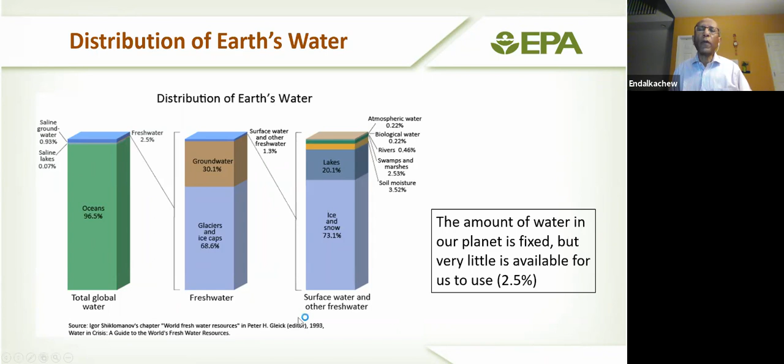So we really have to be very efficient and effective in using this water, and should not pollute it. Because of this, there is a global water scarcity. That water scarcity is defined as a lack of freshwater resources to meet the standard demand of water. Currently, one-third of the global population lives in countries where there is water scarcity, or the water quality is compromised for various reasons. There are many growing factors impacting both the water quality and quantity available for our existence and sustained presence. So what is water scarcity?

Depending on where we live and the conditions, the standard of living of those countries, or the technology and capability of the country, there are a range of causes for water scarcity. Most of North African, Middle Eastern, and Central Asian countries, including Mexico and Southwest United States, suffer from physical water scarcity, where there is not enough water to meet the demands of the public, including farming and other applications. So those really have a shortage of water.

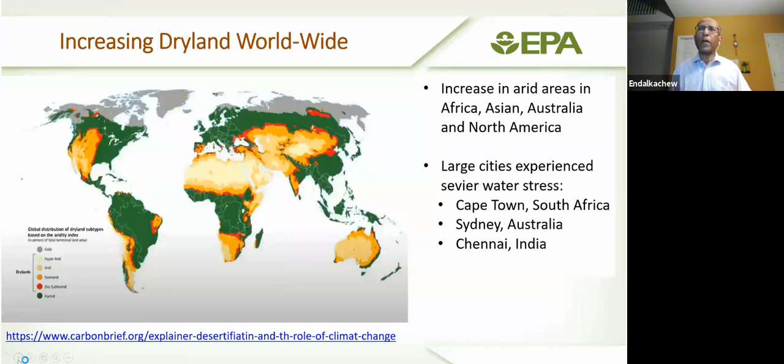That is why in 2016 the Global Economic Forum asked about 750 experts to assess different threats, what the global risks are. There are 29 separate global risks listed, and they were asked for their projection of the major global risks in the next 10 years. Water scarcity became one of the top risks, more serious than climate change, the food crisis, and migration and displacement of people.

Now, of course, this was before COVID, and in the last year there have been some other unforeseen challenges. But water issues are not going to go away. COVID may go away in the coming year or so, but not water scarcity. The link of water scarcity with other issues - economic, social, technical, and environmental risks - connects it to a lot of other problems. This continues to be a challenge.

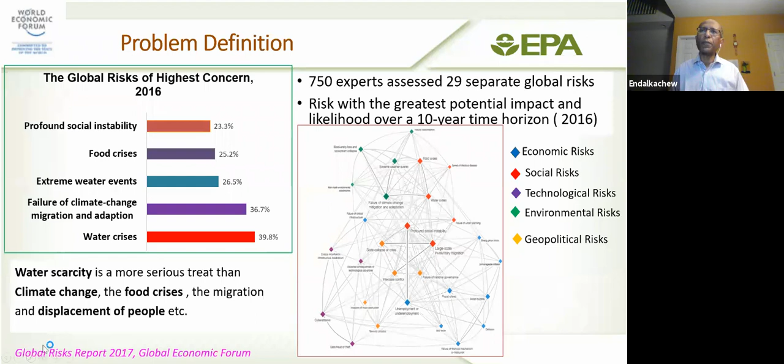In Africa, we have seen that there is a United Nations Development Goal by 2030 to achieve universal and equitable water supply, for safe drinkable water, and also sanitation for the global population. There is a lot of progress towards this goal, but Sub-Saharan Africa still is behind in achieving some of these goals. Part of the challenge is that water scarcity also affects women and children because they are more involved in fetching and collecting water, which could take a couple of hours a day. So it has a lot of social impacts.

When we look at the projection of the next decades, there is one from the World Resources Institute projecting that increasing climate change could worsen the scarcity of water, especially in some parts of the globe. Assuming business as usual, most Sub-Saharan African countries probably will remain near normal or the baseline, but other places - Australia, North America, and most of Asia - will have more impact because of climate change.

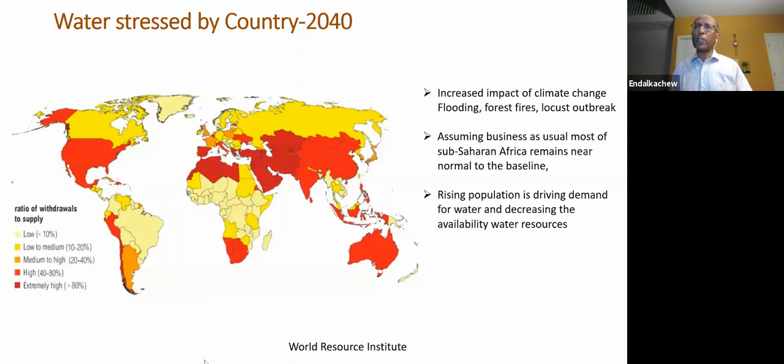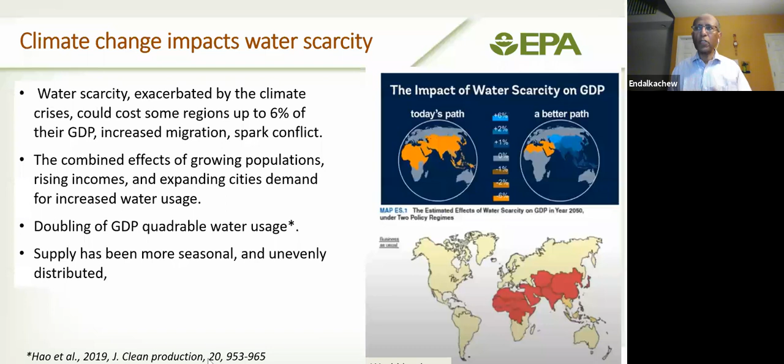As a result of this, the World Bank two years ago projected that increasing water scarcity, exacerbated by the climate crisis, could cost some regions up to 6% of their GDP. The combined effect of population growth, urbanization, and expanding demands because of increasing GDP could increase water usage. In one study, every doubling of GDP quadrupled water usage, and water supply in many African countries is seasonal and unevenly distributed. So efficient use of water is critical.

So when we talk about water issues, I want to put it into different categories. The water shortage may be due to inadequacy of water resources, but in most of Sub-Saharan Africa, it's lack of capacity.

There's a water availability issue because there's too little water in some areas, and seasonal variability. The other issue is accessibility of water, and the third area is water management—allocation, conservation, catchment, and reuse of water is really lacking. Water management is still a serious problem.

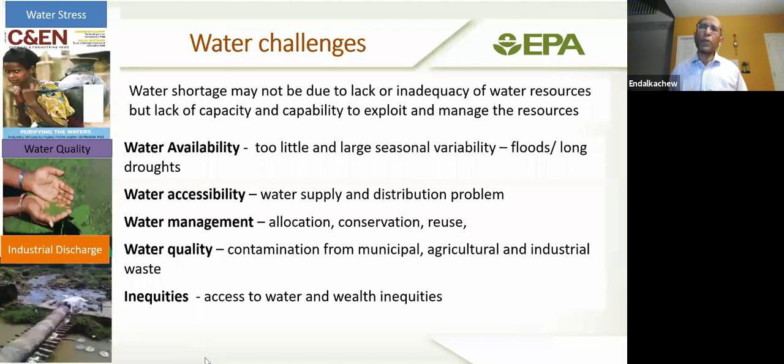Increasing industrialization in many parts of African countries is affecting water quality. Other developed countries have gone through this—China has gone through it, with rapid industrialization causing contamination from municipal, agricultural, and industrial waste. These pictures are from parts of Ethiopia showing discharge from industry or agriculture that could affect water quality. Another issue is water inequities between rural and urban areas.

What's connected to this is that water is still a scarce resource. However, water is connected to food security and agricultural practices, so sustainable use of water is closely linked to food security. Resilient water infrastructure systems are needed to provide fundamental ecosystem services, from providing sufficient amounts of water to avoiding excessive pollution in some lakes and rivers.

We start seeing this in many parts of Sub-Saharan African countries. On top of this, there are local and global factors—population growth, increased standard of living, and urbanization—impacting the quality of water. I want to give you some data I found that may not be current, but is unique to the challenge in Sub-Saharan African countries.

When you look at water distribution in Sub-Saharan Africa, Central, Eastern, and even Western African countries have plenty of water—there are many large lakes and rivers. But Northern Africa has only 1% of the total water resources for Africa.

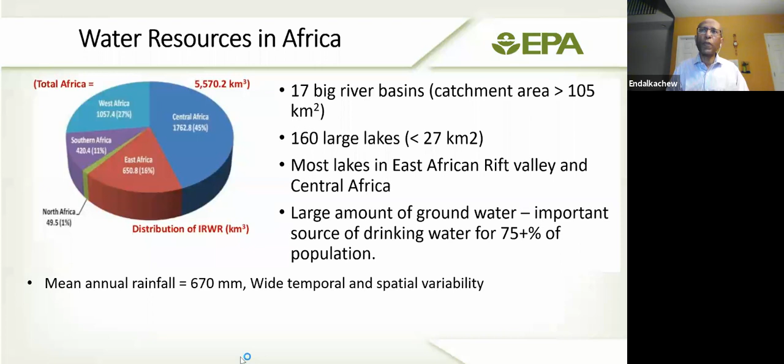But when we see water utilization by African regions, Northern African countries have much higher water utilization, although they have limited resources. Compared to other regions, East Africa uses less than 10% of its water, and Central Africa, which has plenty of water, uses most of it for agriculture.

That's not just unique to Africa, but to Asia—globally, most water is used for agricultural purposes, while a very low amount, less than 10%, is used for industrial use.

I have listed about 16 countries showing water withdrawal—how much water they're using compared to what's available. Northern African countries like Algeria or Morocco use quite a big fraction of what's available. Countries like Egypt use more than 100% of what's available because they also do desalination.

Other countries are not utilizing or exploiting the available water resources—Kenya or Ethiopia use less than 6%, whereas Congo doesn't even use 1%. So it's not just about availability; there is plenty of water available, both groundwater and surface water, but the challenge is more about

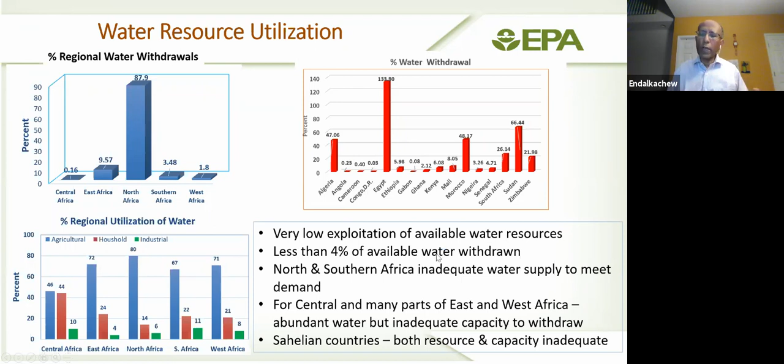making these resources available to the population and making it affordable, and making it a sustainable supply of water to both rural and urban populations. So if you look at this divide between rural and urban areas...

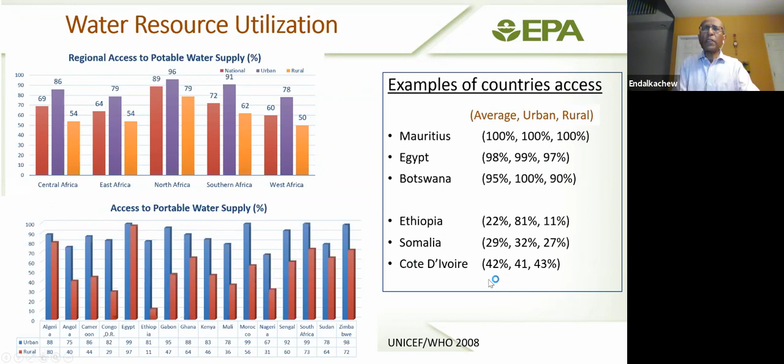According to 2008 UNICEF and WHO studies, in most African countries there's a big divide in availability of potable drinking water between rural and urban populations. In some North African countries, surprisingly, the difference between urban and rural is very low, meaning there's a sufficient water supply for both. But in other areas, there is a big divide, which means this is more a challenge of available technology.

So there's abundant water resources in the middle of the continent, in the eastern and western part of the continent, but these resources need to be available to the people in an affordable, sustainable way. This is where I think small scale and medium scale solar technologies can help address these issues.

Of course, there needs to be more wells available, and rainwater collection schemes need to be developed. So the issue of technology needs to be addressed, and this is where I feel solar technology could fill this gap.

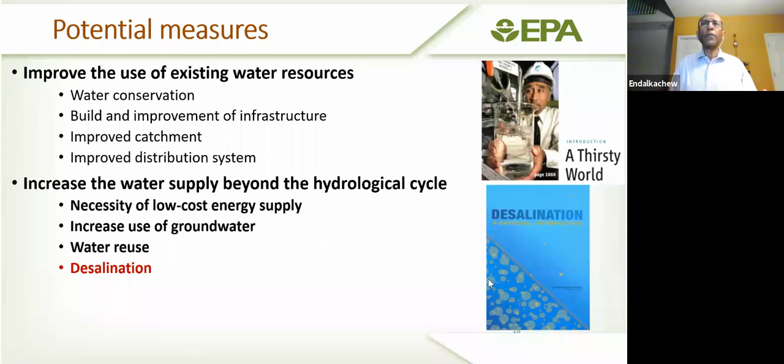I'll mention the relationship between energy and water: you need energy to treat water and to access water, but also for a lot of power generation, especially thermal power generation, you need water. So the two are closely linked, and they are also linked with food security. Energy, water, and food are closely linked factors, where you need one to access the other resource.

Moving away from thermal generation or fossil fuel to renewable energy generation could help us attain a sustainable water management system.

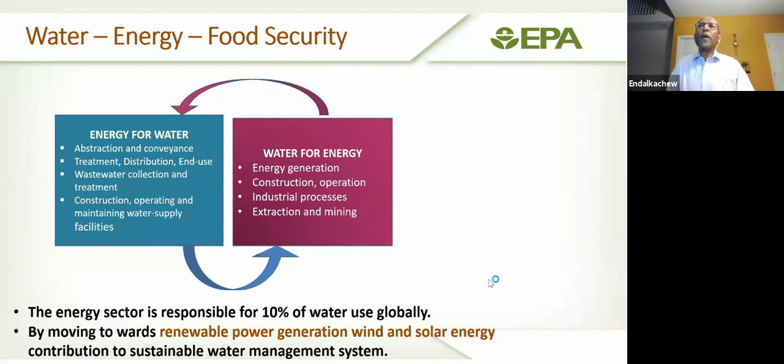When you see the potential generation capacity of energy, most African countries have not even tapped a fraction of their potential. For example, take Ethiopia: the capacity estimated in 2019 is about 74 gigawatts, and right now the current generation is less than 10% of that.

But on the other hand, this estimate does not include solar, and even without that, we can see there is a rapid increase in access to electricity by most Sub-Saharan African countries. A recent study from the World Bank and International Energy Agency shows a 42% increase between 2010 and 2018. I feel like we are getting to the inflection point where, at this rate, full access to electricity could be reached in the next decade or so.

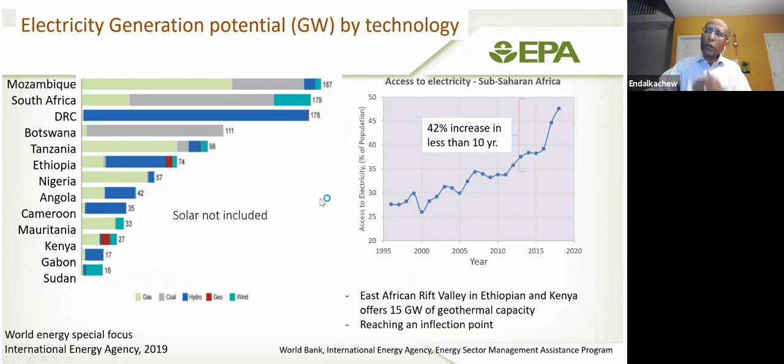So there's a lot to be optimistic about this. I want to talk a little bit more about solar and what solar could bring to this.

By the way, solar is not new. I want to quote Thomas Edison, the famous American inventor, who said about 90 years ago: 'We should be using nature's inexhaustible sources of energy—sun, wind, and tide. I'd put my money on the sun and solar energy. What a source of power! I hope we don't have to wait until oil and coal run out before we tackle that problem.'

He was saying this to Henry Ford, CEO of the Ford Company, and also to Firestone. So what I see here is that there's a lot of potential that people noticed and thought about a long time ago, and Africa is rich with this.

Much of Sub-Saharan Africa receives solar radiation on the order of 6 to 8 kilowatt hours per meter square per day, which is much higher than most of the globe, and this is all year round. So there's huge potential for solar to generate electricity both off-grid and for grid providers. One estimate by IEA is that South Africa, Ghana, Kenya, and Rwanda could reach full access to electricity in the next two decades.

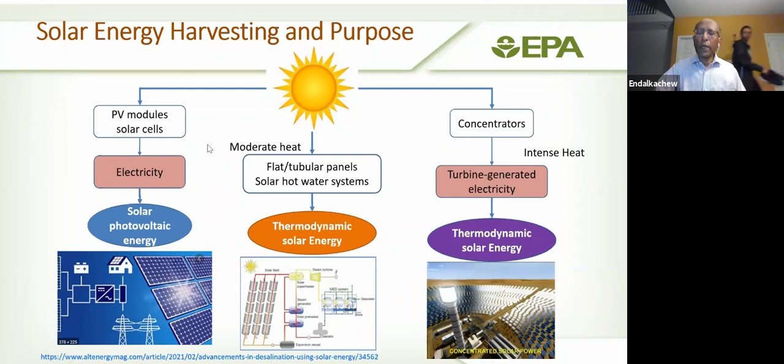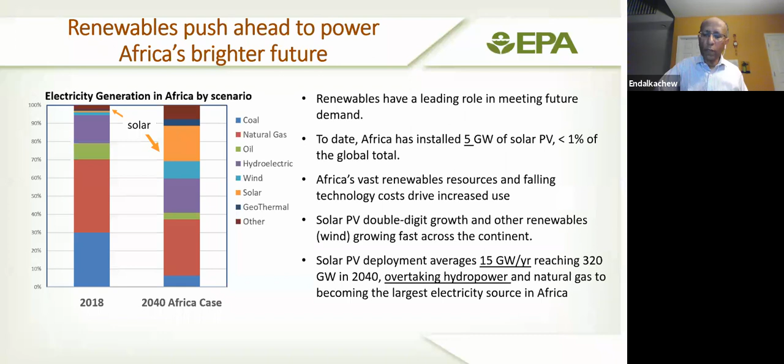As you see here on the bar chart, the orange boxes show that in the next 20 to 40 years, solar will be contributing a big portion of the total energy. Off-grid solar power can be used in Sub-Saharan Africa for places where energy is needed.

The neat thing about it is that you can place it incrementally from a small scale depending on the demand. It can be modular, so you have a mini grid for remote farmers or villages, or increase its use as the demand increases.

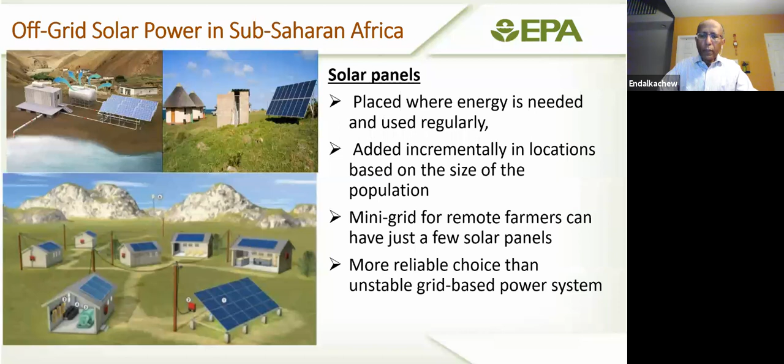It can be used for agricultural application, for irrigation, for pumping, and for other farm applications. That is why I think solar energy has the potential to transform rural Africa and hopefully narrow this gap between access to clean water between the urban and rural divide.

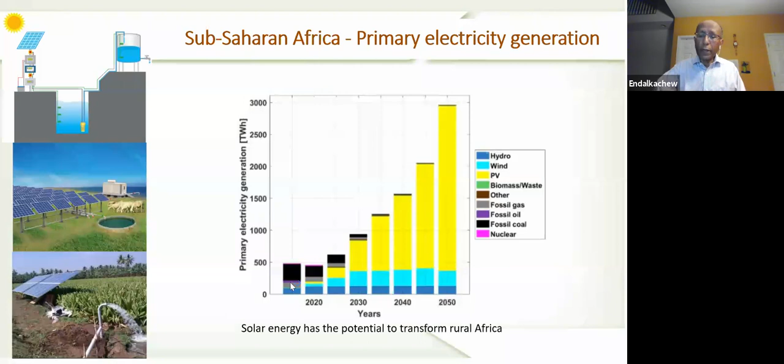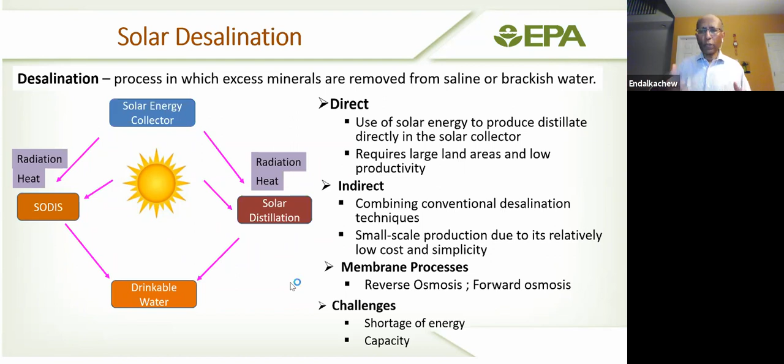I want to talk a little bit more about solar water treatments, purification, desalination, distillation, and disinfection. In a small scale, there are proven techniques for solar disinfection technologies. Solar energy can be used to disinfect drinkable water, which is a direct use of solar, no electricity or anything. There are other solar distillation technologies, thermal distillation, or the solar energy can be used to generate electricity and run membrane processes. So a wide range of options are there depending on the cost and availability of technology.

If we look at the solar disinfection technologies in small scale, it's an effective way. The WHO is promoting this, that it's suitable for developing countries that lack access to safe drinking water. What's called SODIS has shown some promise, but it's still a very low, small scale, and it's only for treating pathogens.

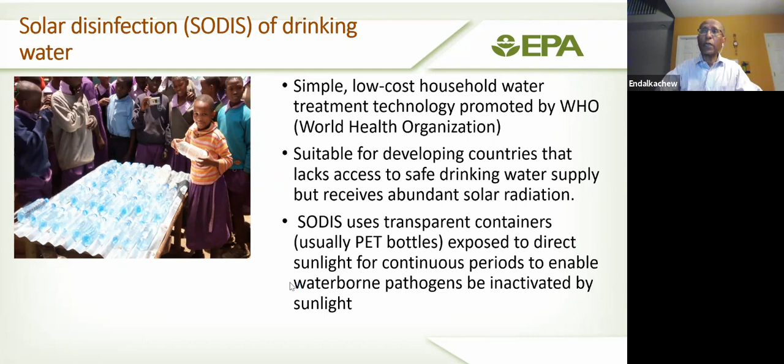But it's a solar technology that can be scaled, and here's a scaled system up to 200 liters in 5 hours. In intense sunlight, you need to expose the water for about three hours to completely disinfect it.

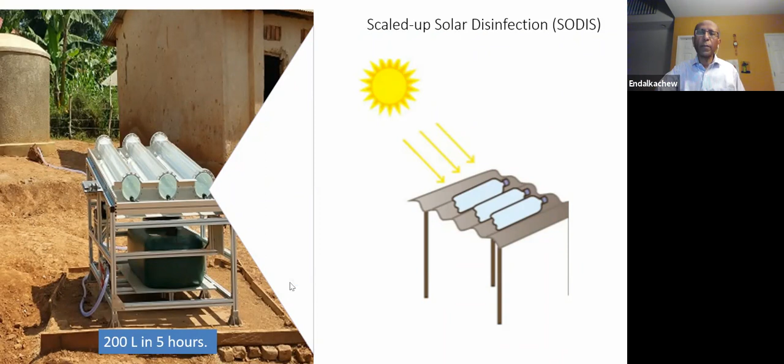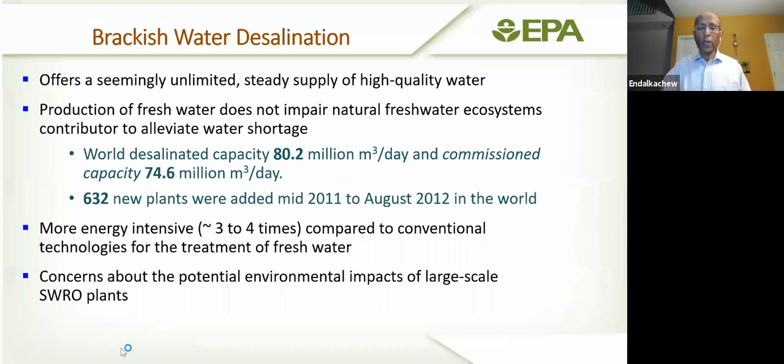The other is desalination. There's a lot of brackish water, and many countries also have access to seawater, so there's a lot of resources that can be treated and used for drinking water. A range of technologies are there, and the simplest one is direct solar desalination.

Direct solar desalination is a low capacity approach where the solar energy is used to heat the water, and then it's condensed. This occurs like in a greenhouse, but the amount of capital investment in this is very low. You can generate up to 5 liters per meter square, which is about 200 meter cubes per day. It does require a large area if you want to scale it up.

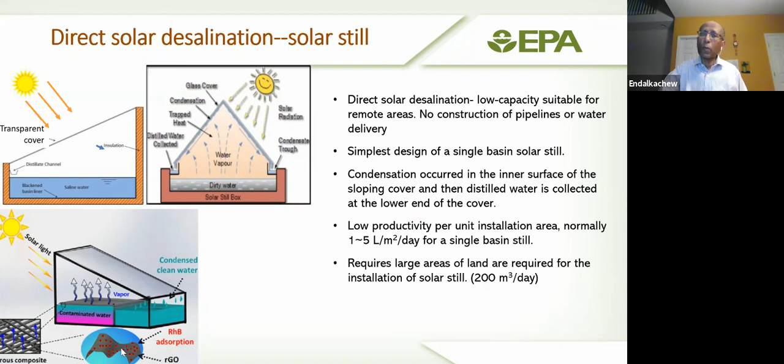The technology is available for areas where there is brackish water that can be converted into drinkable, potable water. There are some cost estimates for this, about 1 cent per liter of production, compared to other water sources that may not be available.

This could provide water for small villages or small communities, and there are many ways of improving it, but you have to look at the simplicity and the economic feasibility of a more complicated system.

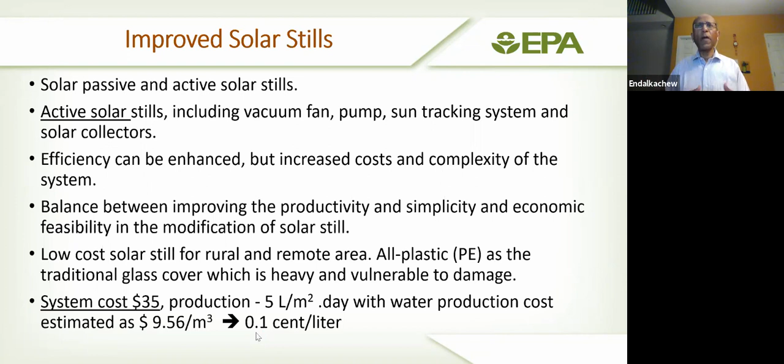In some areas, this is also connected to greenhouses, so we can integrate the design of a greenhouse combined with solar stills. This way, you can use it not only for generating water from brackish water, but also do some greenhouse farming, providing both drinkable water and small scale farming.

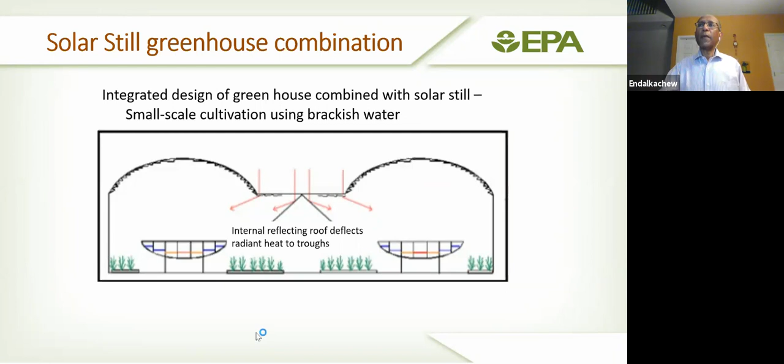Another approach is flash distillation using thermal processes, which is used in the Middle East and other areas. This is currently the dominant thermal desalination technology, with about 20% of worldwide desalination using thermal processes. It requires capital investment, but it is feasible in many African countries where there is plenty of brackish groundwater.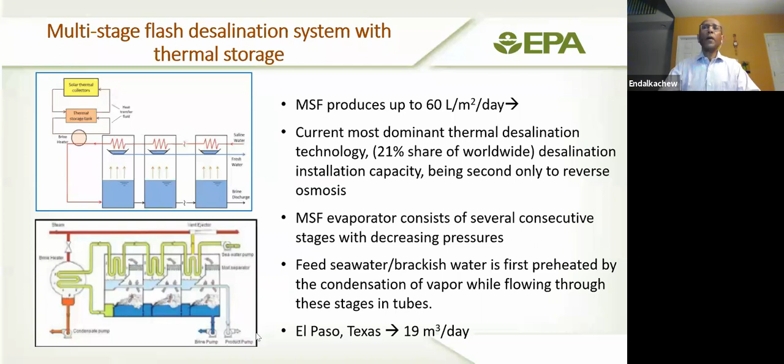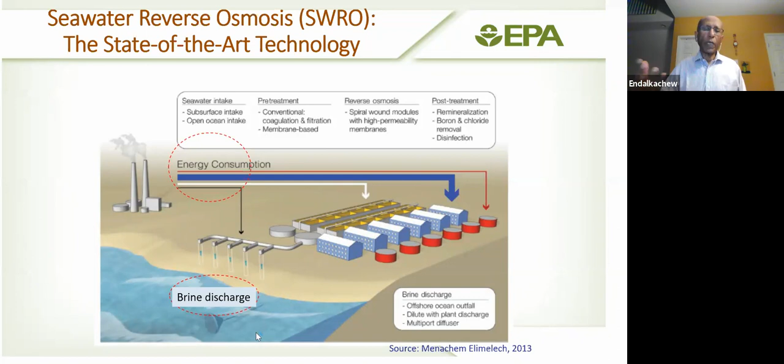The major desalination technology, though, is reverse osmosis, which has a lot of potential and is used widely in the Middle East, in Saudi Arabia and the Gulf countries. There's a lot of capital investment required, especially in membrane technologies, but the technology has improved over the past 40 years - the cost of water production and energy used have both gone down. Still, it has significant environmental impact and issues with public acceptance.

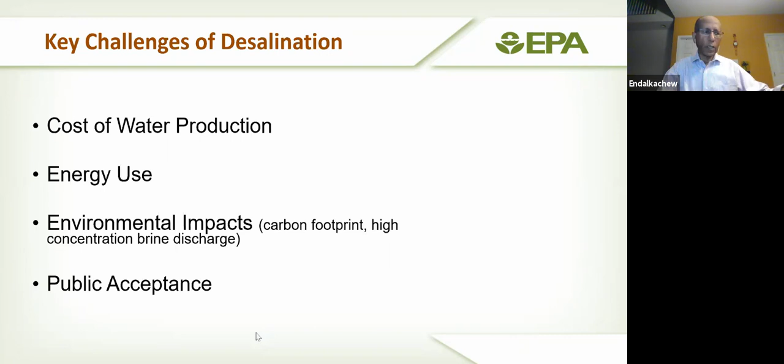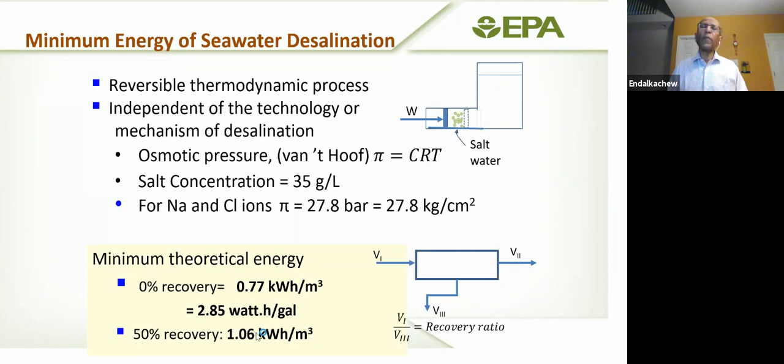We worked a lot on addressing the energy demands for reverse osmosis technologies. There is a thermodynamic limit to how much energy is needed - about 2.8 watt-hours per gallon of water. From the 1970s to today, the energy demand for this technology has really declined due to improvements in membrane and operation, both in forward and reverse osmosis. The cost is still far too high for a lot of countries, but it could supplement water supply in urban areas in some African countries - Djibouti, for example, uses a significant part of its water from desalination.

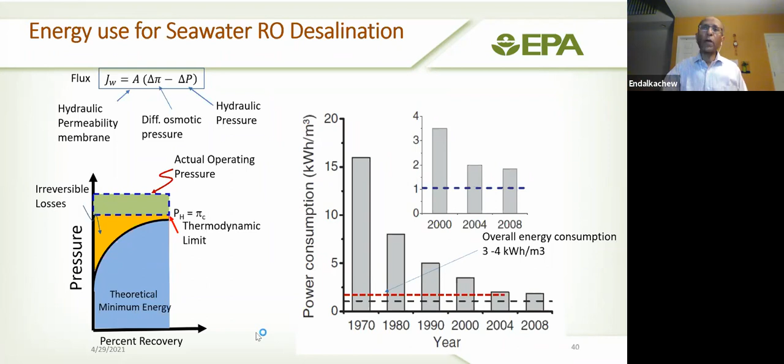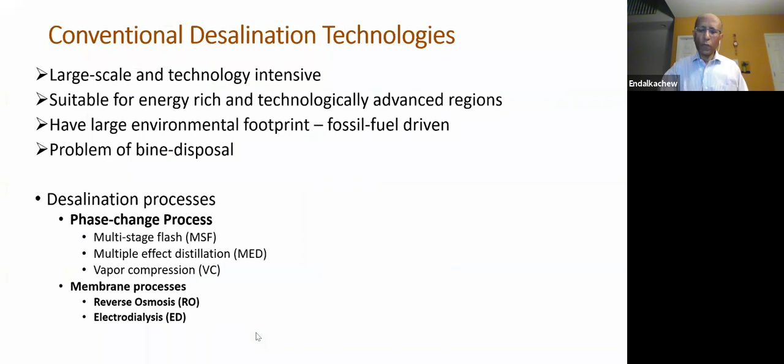Conventional desalination technologies are large-scale, have intense energy demand, and there's the problem of brine disposal. So we are looking for better alternatives to conventional desalination technology.

One approach is to use sunlight to generate electricity to run the system. The cost of membrane technology is still there, and the cost of brine disposal is an issue. However, integrating this with solar energy could reduce the overall cost of the system - the abundant resource of sunlight and avoiding fossil fuels could have a lesser environmental footprint. However, scaling the technology up remains a challenge, and of course you can't use this for agricultural application.

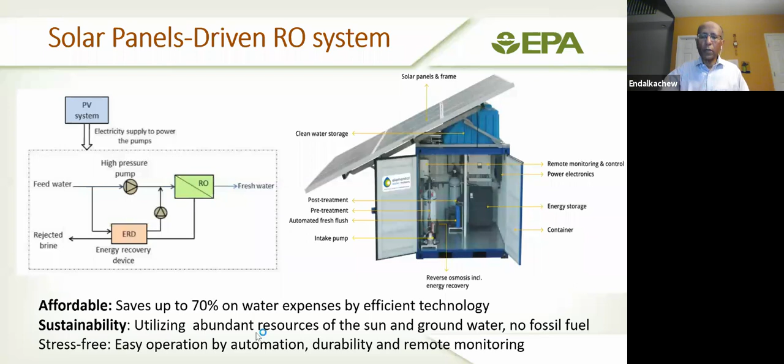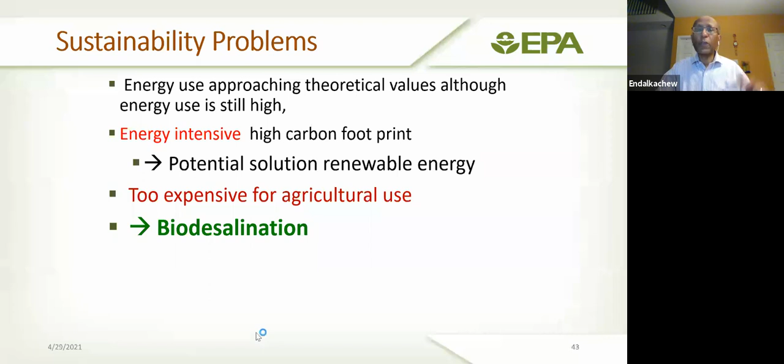Another approach, still experimental, that we're developing in collaboration with many people including Dr. Foleka's group, is biodesalination. This is a very innovative technology at a very early stage, but there is a lot of interest in it because of its potential, if it works. The idea is to use halophytic algae, which can live in saline environments, to actively grow and absorb the salt, reducing water salinity. Growing algae at large scale is already a proven technology used for biomass and biofuel generation.

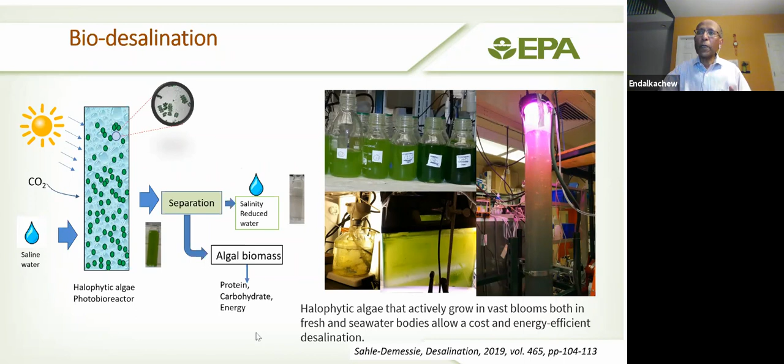We have done some work on this, and others are continuing research in the United Arab Emirates, Chile, and Ireland, as well as in Ethiopia and Egypt. What we envision is that biodesalination can be integrated with energy harvesting - harvesting the algae for energy use - and also used for CO2 sequestration, since you need CO2 for growing the algae. This is at an early stage, so I'm not sure if it will be feasible, but it's another way of using solar energy to provide clean, safe water, especially for agricultural application.

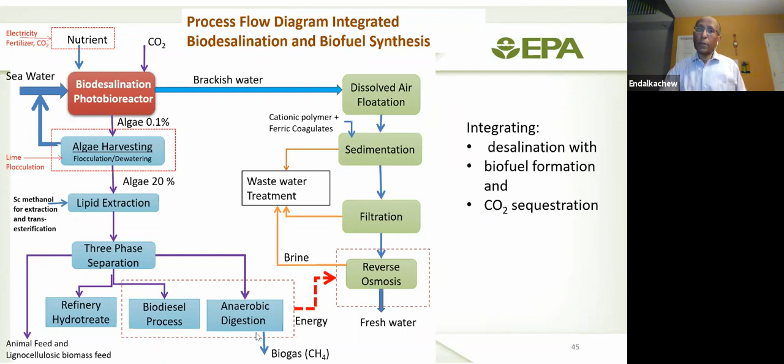Lastly, I want to talk a bit more about decontamination. This has become an issue as countries become more industrialized. There are solar-based treatment technologies - I mentioned SODIS - but one is solar decontamination through photocatalytic treatment. Our group has done a lot of work on photocatalytic treatment of contaminated water.

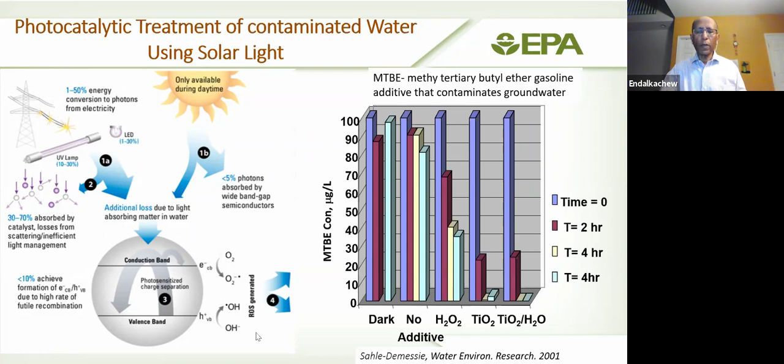The chemistry works very well for a lot of organic contaminants, but there is an issue of scaling up and cost. When we looked at this, a lot of our work focused on methyl tertiary butyl ether, a water contaminant used as an oxygenate additive in diesel and gasoline.

When it's discharged and contaminates groundwater, you can treat it using solar, actually, with photocatalysts. However, in lab scale and small scale, it works fine. But in an actual groundwater where it has a lot of other ions, the technology is not as effective.

So there are a lot of technologies that require solar, that work on solar energy, especially in small scale, but scaling it up and making it available requires further development.

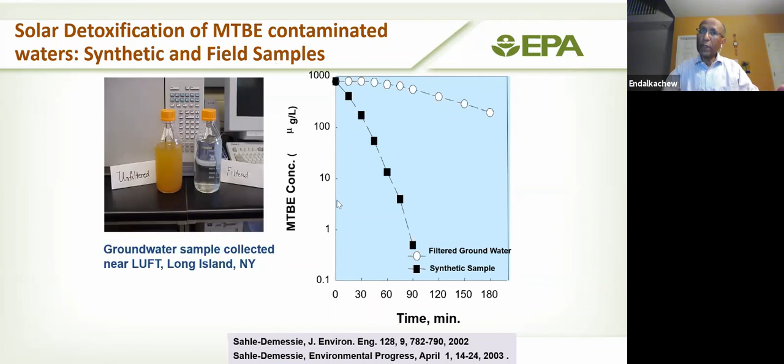From what I think, the potential for increasing solar energy, especially as an off-grid solution, is high in most Sub-Saharan African countries. So we need to diversify the current energy generation and make it more climate resilient, to achieve a better future.

So I want to conclude my talk: water security is critical for sustainable growth and to develop resilient water supply systems. Renewables, especially bio, hydro, and solar, have a high capacity to address this, and there are still untapped resources that could address this issue. Off-grid energy generation allows innovation in water supply, water treatment, and recovery. Further investment in science and technology could lead to major advances in providing affordable water for Africa.

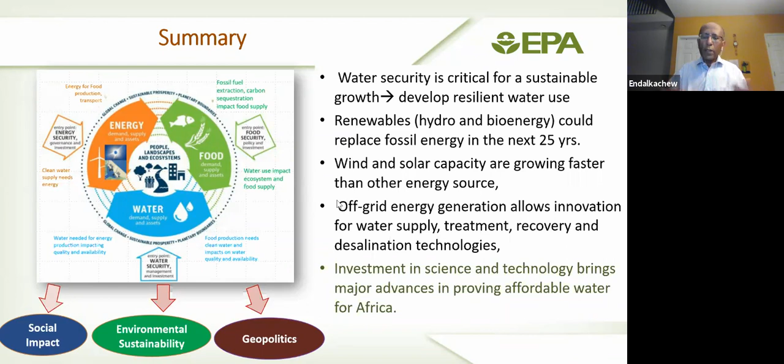That is why I like to quote former President John F. Kennedy, who said anyone who can solve the problem of water will be worthy of two Nobel Prizes, one for peace and one for science. So, although 60 years later the problem of water is still there, advances in science and technology give us ample confidence that Sub-Saharan Africa will overcome this challenge within the next decade.

So more effort is needed for a better water future, because as the ACS and chemical community say, without water there is no future. So I thank you for your attention, and I thank you.

I would be glad to answer some questions.